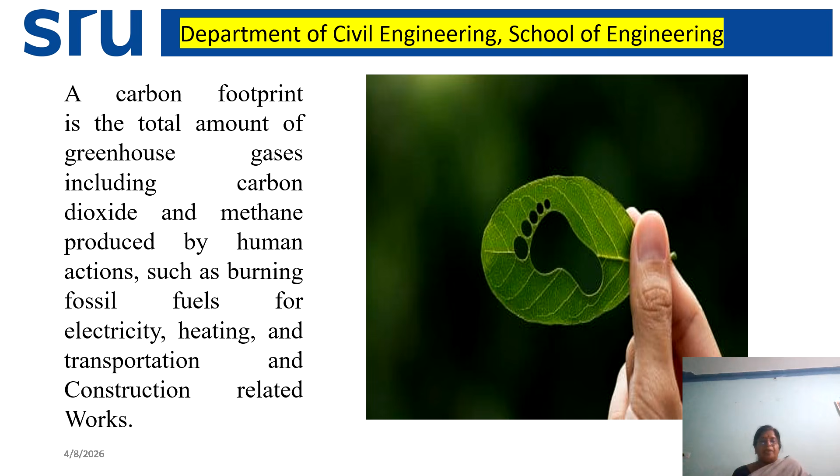After the 19th century, a big boom for the construction industry was established, especially with the Industrial Revolution, which led to urbanization and the vertical growth of structures. Fast and vertical growth is achieved in construction with the help of materials like brick, cement, steel, glass, aluminium, artificial paint, normal concrete, reinforced concrete, special concrete, and etc.

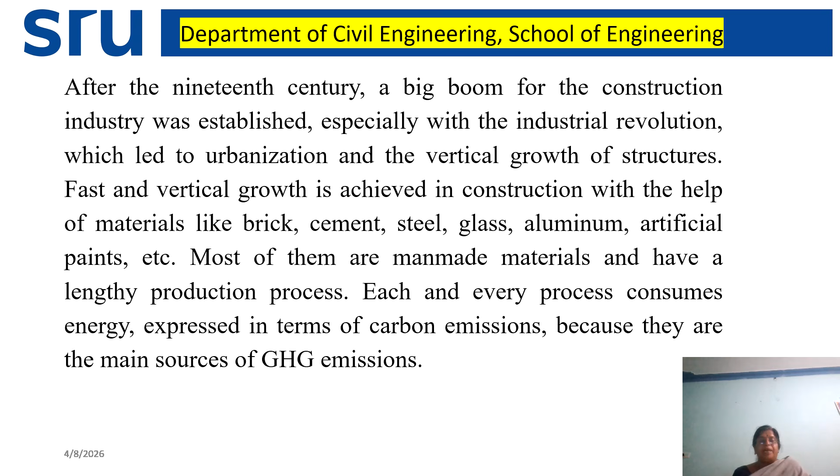Most of them are man-made materials and have a lengthy production process. Each and every process consumes energy expressed in terms of emissions of carbon, because they are the main sources of greenhouse gas emission.

Sources of carbon emissions from various sectors: industry 32 percent, transportation 23 percent, building operations 28 percent, building materials and construction 11 percent, and others 6 percent.

So here, building materials and construction related activities are totally responsible for around 39 to 40 percent of the greenhouse gas emissions due to construction related works.

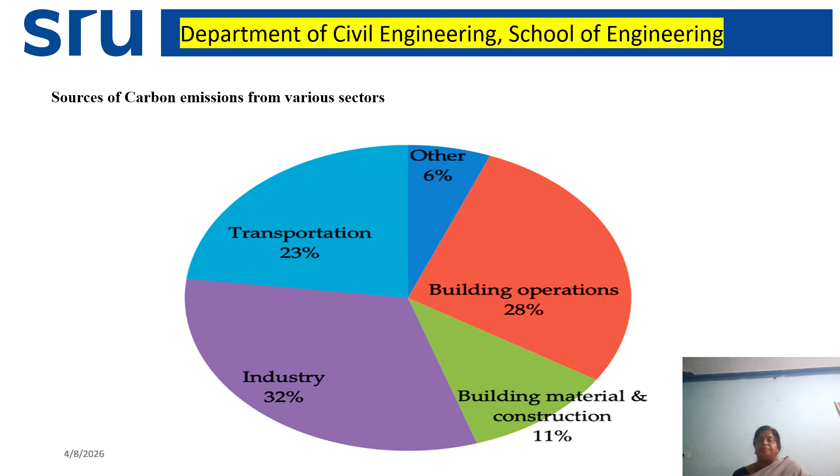Other sources of carbon emissions because of building materials: starting with cement, the prime material which releases 30 percent of the carbon dioxide. Next, ceramic materials, including floor tiles and wall tiles, emit 20 percent of carbon dioxide. Steel manufacturing - nowadays without steel there is no construction.

Steel releases 20 percent, concrete 12 percent, gravel 5 percent, aluminium 3 percent, prefabrication work 3 percent, wood 1 percent, and PVC and other materials 6 percent. These are the percentages of sources of carbon emissions from different building materials.

So instead of these materials, if we go for alternate materials, then construction related activities will be totally changed and the greenhouse gas emissions may also be reduced to some extent.

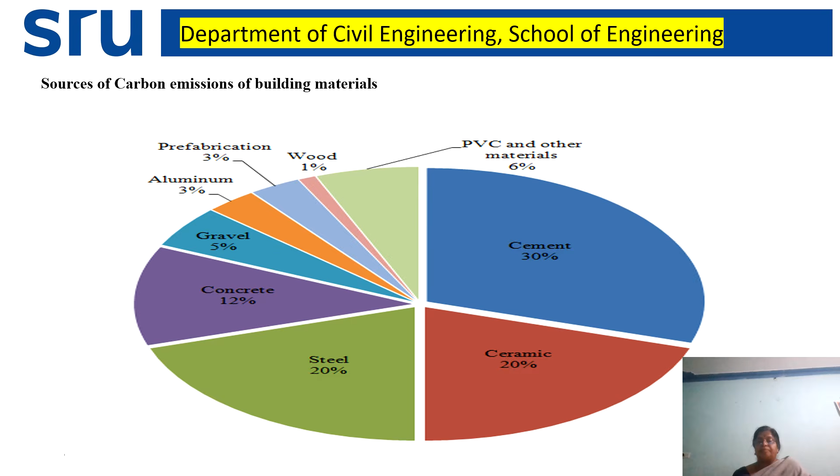The construction industry is a major source of carbon emission and contributes 40 percent of global CO2 emission. So the need for sustainable and eco-friendly practices is very, very important and essential. Carbon-free construction aims to eliminate emissions of greenhouse gases like carbon dioxide and methane.

So what is carbon-free construction? Carbon-free construction aims for zero or minimal carbon emission. It focuses on low carbon materials and methods, and use of renewable energy sources.

So the life cycle approach will be totally different. Design will be changed - the entire design is based upon what type of material we are using. Then construction practices: if the construction duration increases, greenhouse gas emissions will also increase, along with services and operation of buildings. So we are concentrating on building materials, design, construction, and methods.

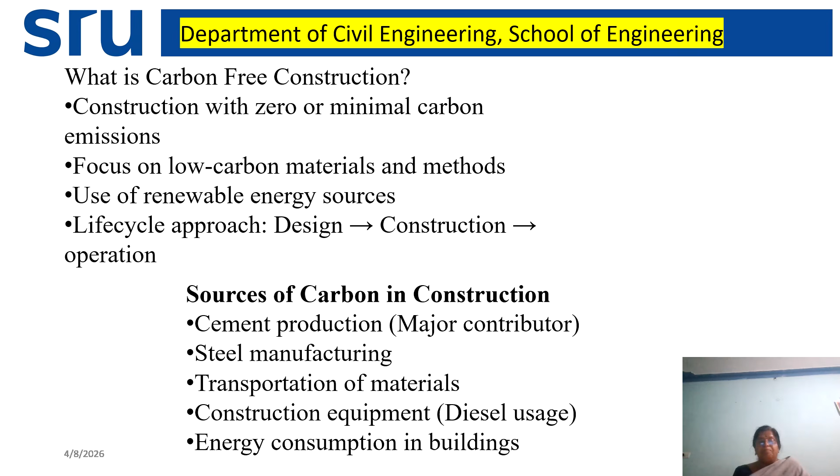Then we can reduce the maximum amount of carbon. So, sources of carbon in construction: cement production, steel manufacturing, transporting of materials from one place to another, construction equipment, and energy consumption in buildings during operation.

Acid rain also plays a major role due to urbanization. Because of urbanization, industry growth is more. That is good for the circular economy, but it is not good for the environment.

Once the gases are available in the atmosphere, when rain comes, it will not be normal rain. The pH value of the rainwater will be less than 7, and it is considered acid rain. Acid rain totally affects crop rotation, health of human beings, and other living beings.

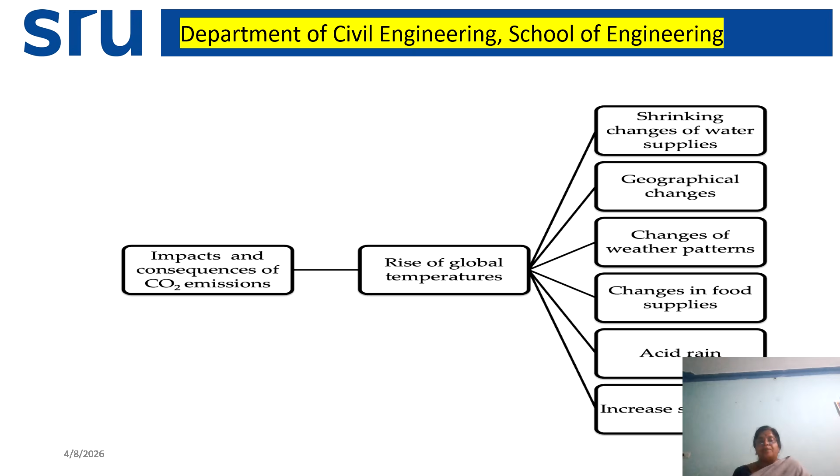So what are the strategies in reducing carbon dioxide emissions in the building sector? First, we have to set perfect standards and policies to reduce carbon dioxide, adopting low carbon technologies, then restriction of energy utilization, then impact assessment of the building process and materials. These are the strategies we can follow to reduce CO2 emissions at the construction site.

Here, standards and policies are very, very important. They should be created and implemented by the government, from the central government to the local bodies. All these things are to be first established and followed, so that we can easily control the carbon dioxide emission.

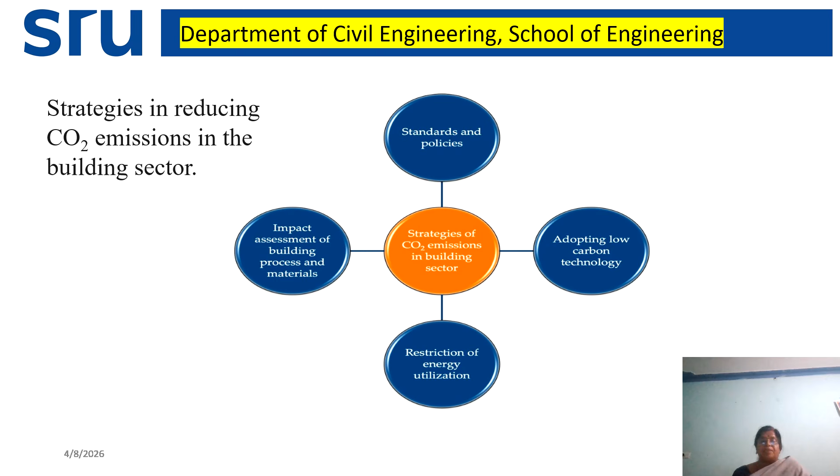Globally, construction materials are responsible for 40% of greenhouse gas emissions. Due to the emission of greenhouse gases, changing climate, global warming, melting of glaciers, and rising sea levels are the major issues related to the environment.

Rising sea levels due to melting glaciers will play a major role affecting maximum cities globally. Cities like Madras are situated at zero reduced level, so they will easily be occupied by sea waters when the sea level increases. Engineers and scientists are warning governments that by 2040, some places, mainly in South India, will go into the sea because of rising seawater levels.

So we have to take care of everything, and cities need to be protected from seawater intrusion, or the land should be protected.

These carbon emissions in construction can be reduced with the help of carbon-free construction materials like bamboo, lime, biochar, ceramic powder, fly ash, crumb rubber, and recycled aggregates. Reducing and replacing conventional materials with these low-carbon materials will control carbon emissions to a significant level. A lot of research is being done in this area to initiate the reduction of carbon emissions.

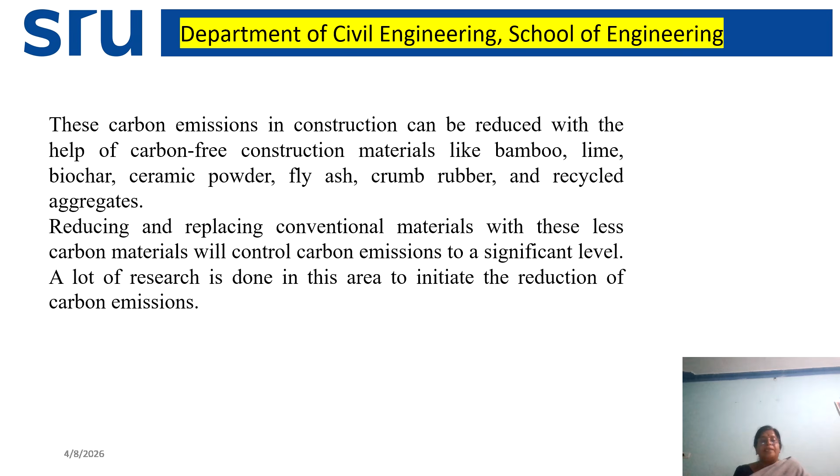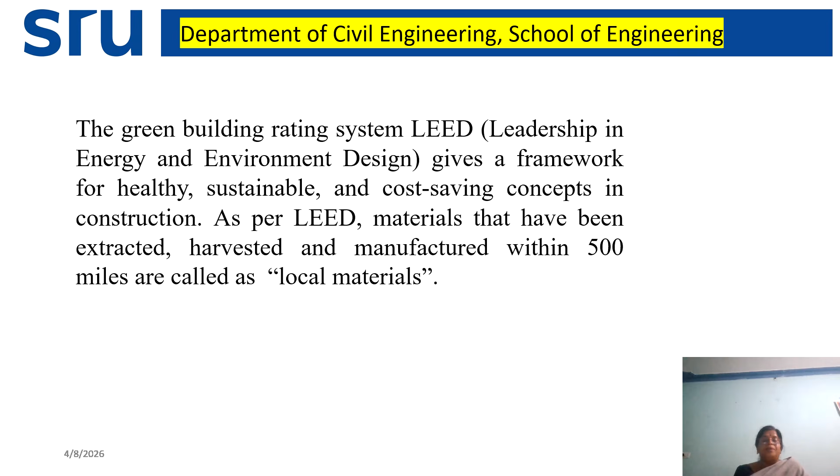The Green Building Rating System, LEED, which stands for Leadership in Energy and Environment Design, gives a framework for healthy, sustainable, and cost-saving concepts in construction. As per LEED, materials extracted, harvested, and manufactured within 500 miles are called local materials. If we use local materials, the transportation cost will be considerably reduced, so we can reduce the emission of carbon dioxide.

Major international rating systems: the first is LEED, Leadership in Energy and Environmental Design, developed by the USGBC, which is used globally. Another is BREEAM, Building Research Establishment Environment Assessment Method, the oldest system, followed in the UK. Next is Green Star, used in Australia, New Zealand, and South Africa.

Another one is CASBEE, the Comprehensive Assessment System for Built Environment Efficiency, which focuses on environmental efficiency in Japan. Another is DGNB, the German Sustainable Building Council, which strongly emphasizes life cycle performance. Another is WELL, or Well Building Standard, which focuses on occupant health and comfort.

For the comparison of green building certifications: the first is LEED, another is BREEAM, another is Green Globe, then Living Building Challenge, then GBI, which is based in Malaysia. All these standards are established to reduce the emission of greenhouse gases like carbon dioxide and methane, but the assessment procedure is somewhat different.

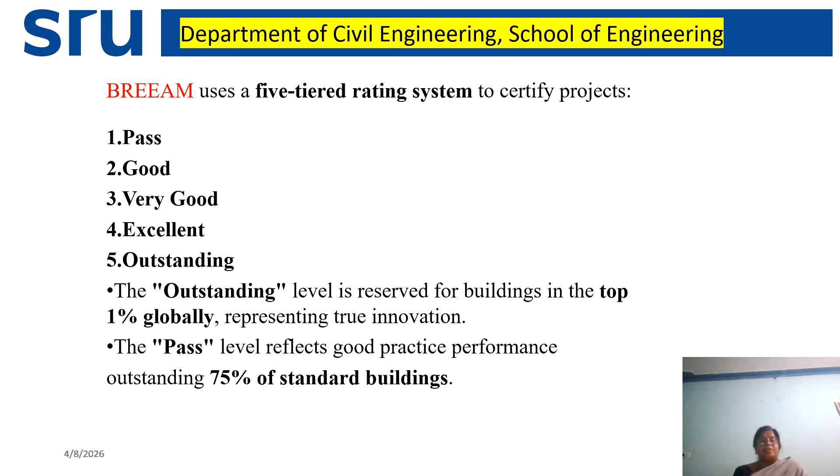The project must earn at least 35% of the total 1000 points to achieve Green Globe certification. The certification has four levels determined by the percentage of points achieved. The Green Globe certificate is totally different from the previous ones; here we rate with the number of globes, like 1, 2, 3, and 4 globes.

One globe means points lying between 35 to 54 percent, that is the entry level. Two globes means starting at 55 and ending at 69 percent, the next level. The third level starts at 70 percent and ends at 84 percent. Four globes is the extreme level certificate, responsible for 85 to 100 percent marks out of the 1000 points. So the higher ratings reflect greater environmental performance and project sustainability excellence.

In India, the green building rating system is based upon GRIHA, Green Rating for Integrated Habitat Assessment. This is India's national rating system by TERI and the Government of India. It is India's national rating system for green buildings, developed by the Energy and Resources Institute, simply called TERI, and adopted by the Ministry of New and Renewable Energy to assess the environmental performance of buildings throughout their life cycle.

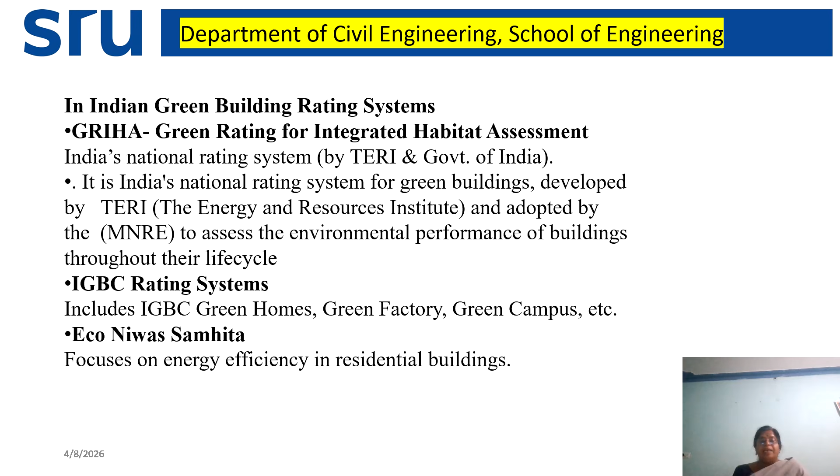The IGBC rating system includes green homes, factory, campus, and so on, and Eco Niwas Samhita, which focuses on the energy efficiency of residential buildings.

Other notable systems include EDGE, Excellence in Design for Greater Efficiencies, which is popular in developing countries. It is very simple and cost effective, and it leads to the Living Building Challenge, one of the most stringent green certifications.

The role of IGBC in India, that is Indian Green Building Council, is to drive sustainable construction in India through rating systems, certification, awareness and policy support. This rating system is different for buildings like green homes, green factories, green schools and green cities. These systems guide designers to build energy efficient and sustainable structures.

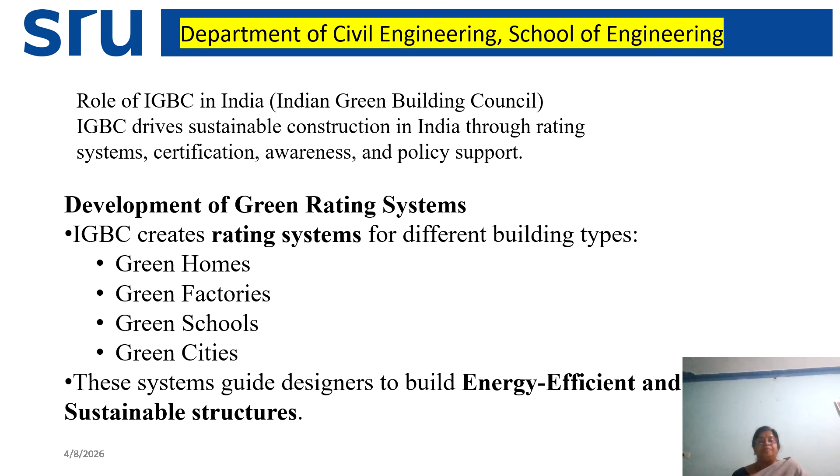The Indian Green Building Council is headquartered at the CII office, that is Sohrabji Godrej Green Business Centre, Hyderabad, India. Additional regional chapters are also available at major cities in India, like Chennai, Bangalore, Mumbai, and Delhi. These chapters support local projects and give training to construction people, along with certification activities.

The certification of green buildings evaluates projects as certified, silver, gold, or platinum. Certified is just the entry level. Silver is the second level. Gold is the better level, and platinum is the best level, the top level certificate. It encourages builders to achieve higher sustainability standards.

Promotion of energy and resource efficiency is focused on reduced energy consumption, water conservation especially through rainwater harvesting, and waste management. It supports India's carbon reduction goals.

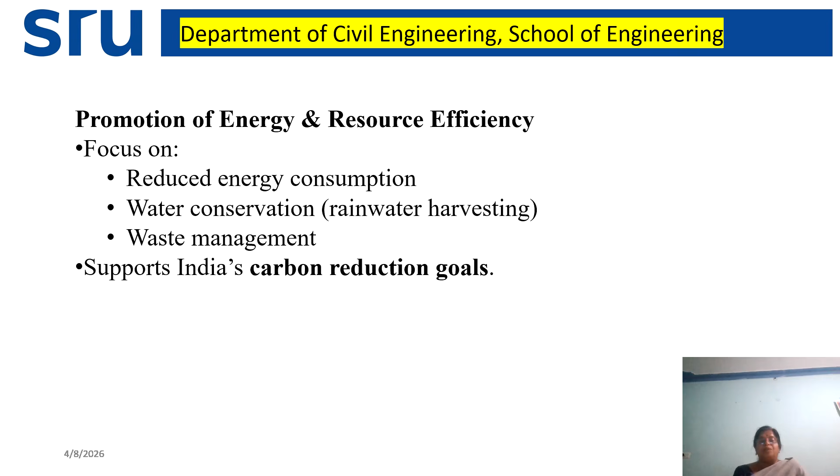It also creates awareness, training and capacity building. It conducts workshops, training programs and conferences, and educates architects, engineers and students about green construction.

What are the possible ways to reduce carbon dioxide emissions from construction and buildings? First, we can go for alternate materials. Bamboo is the best material which can be used as reinforcement.

Bamboo is very good at absorbing CO2 and releases 35% of its oxygen from the standing tree. Since long centuries, bamboo has been an excellent material and can be used as a structural and non-structural material like scaffolding. Bamboo is not good in shear, so stirrups should always be in steel.

We should not use bamboo for stirrups, but here we can regenerate it, which is the main good thing about it in construction. Nowadays, we are not at all using bamboo. We have to create awareness among students and other stakeholders about how bamboo can be used as reinforcement in construction.

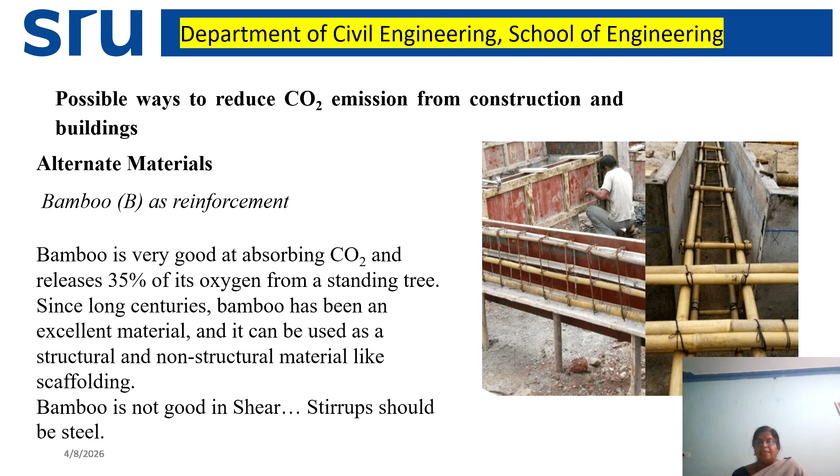So here we can adopt the main reinforcement as treated bamboo, and we can compare the properties of bamboo with steel.

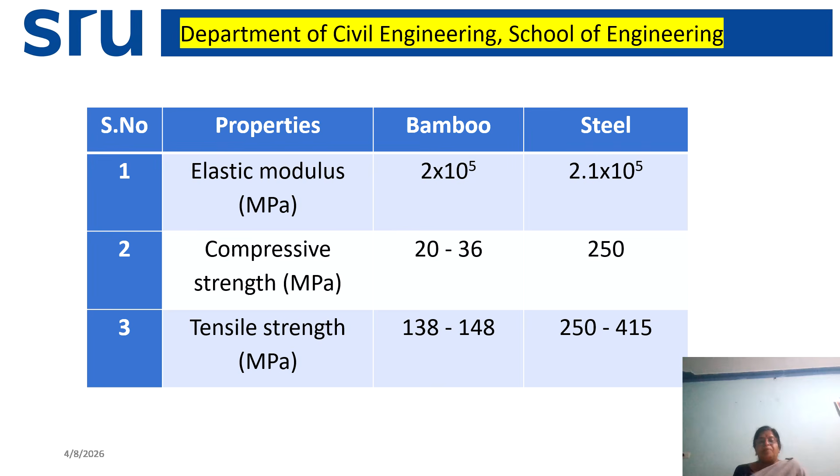For tensile strength comparison, bamboo can go up to a maximum of 150 Newton per mm square, while steel starts at 250 and nowadays we are able to get FE 600 as well. But even though bamboo's tensile strength is only 150 Newton per mm square, we can use it as a reinforcement material for temporary structures easily.

Next, we can go for cement replacement. Cement releases an equal amount of carbon dioxide during production, so nowadays a lot of measures are taken to reduce carbon dioxide from cement manufacturing.

Lime is an ancient material used for building construction. Hydraulic and non-hydraulic lime are the categories of lime. It is an alternative material for cement and is used in energy conservation. It has good workability, durability and self-healing properties, and due to its alkaline nature, it is highly resistant to acids.

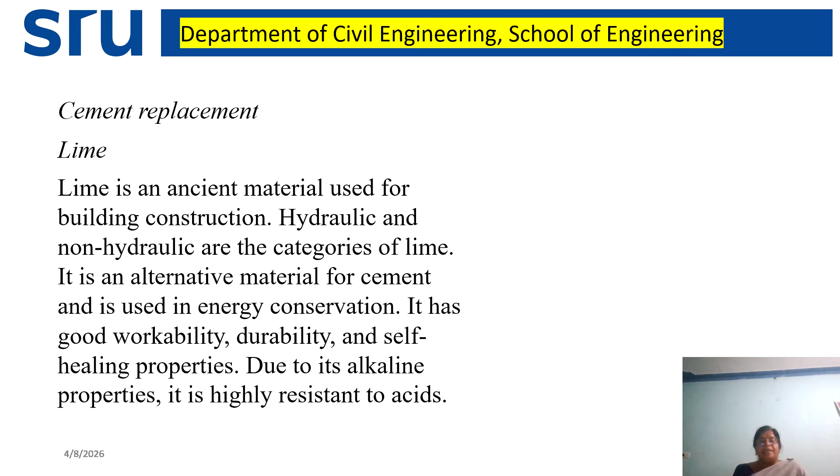Another option is fly ash. Fly ash is the residual substance resulting from the burning of coal, and is often regarded as the most readily accessible and underutilized resource globally. The global annual production of fly ash exceeds 900 million metric tons, so it has maximum advantages.

Fly ash can be easily mixed with cement during manufacturing. When comparing cement and fly ash, the particle size of cement is not round, but fly ash particles are perfectly round, so when mixed with cement, the workability of the cement can be increased.

Fly ash can easily react with the calcium hydroxide in cement, forming cementitious products again, which is responsible for the secondary production of CSH gel, so we are able to get high strength concrete. Fly ash is a waste material available at thermal plants, and this waste material can be converted into a wealthy material when mixed with or partially replacing cement. So Portland cement has been manufactured with 5% replacement of fly ash as a performance enhancer.

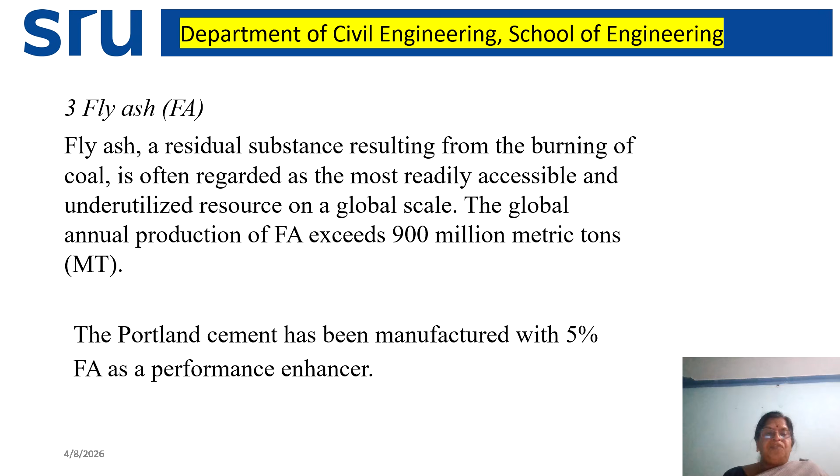GGBS is the ground granulated blast furnace slag. It is one of the important mineral admixtures, and an abundant quantity of such slag is available as an industrial byproduct. This has more calcium oxide and silicon dioxide content and is considered a supplementary cementitious material.

Silica fume, metakaolin, rice husk ash and sugarcane bagasse ash are a few examples of mineral admixtures employed for cement replacement, and the supplementation of these mineral admixtures in concrete as cement replacement material proved to be superior when compared with ordinary Portland cement.

When we are using fly ash, GGBS, silica fume, metakaolin, rice husk ash, and the remaining byproducts, the particle size of these products is very less compared with cement. So the pore structures present in the cement are easily filled with these byproducts, so that the permeability of the concrete can be reduced easily and the performance can be increased.

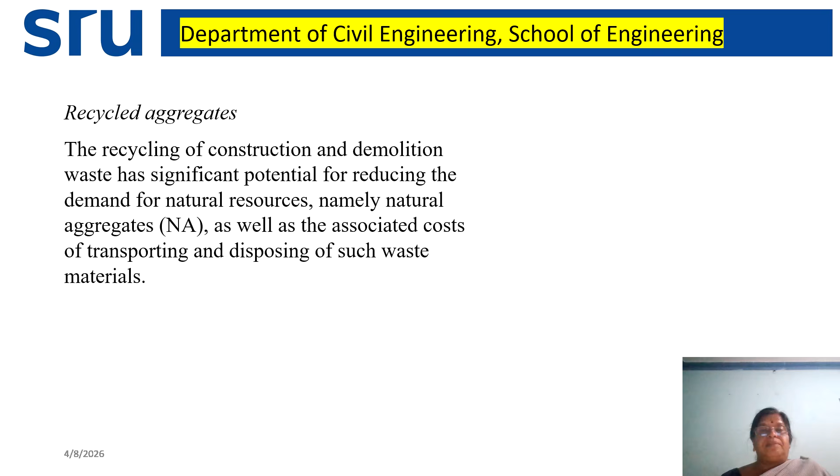Manufactured sand, or M sand, is an eco-friendly, high-quality artificial sand produced by crushing hard granite rocks into fine particles, offering a sustainable alternative to river sand. It features an angular shape for better concrete binding, and it is free from impurities, ensuring high consistency for concrete and plastering work.

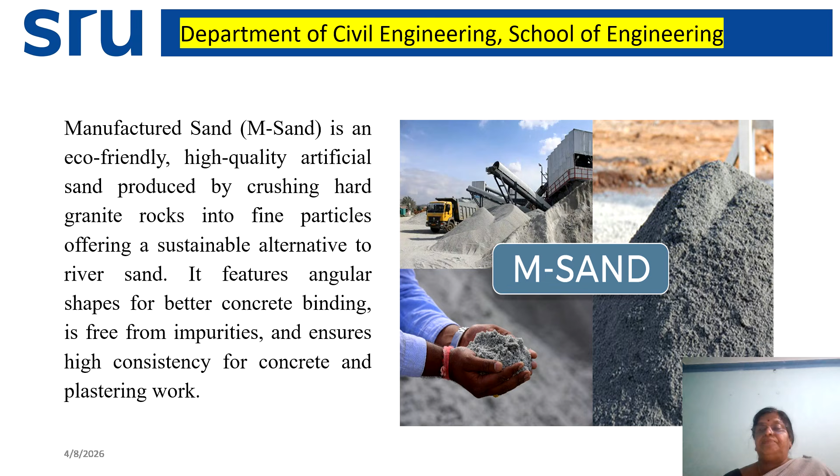The advantages are: cost effective, we can reduce the cost up to 40 to 50 percent less than river sand; strength is more, it offers high compressive and flexural strength to the concrete; wastage is zero, so no cleaning or sieving of the sand is required; and it is sustainable, reducing dependency on natural river beds so that we protect the river, and by protecting the river, the groundwater level can be increased, so that agricultural works will be maintained better.

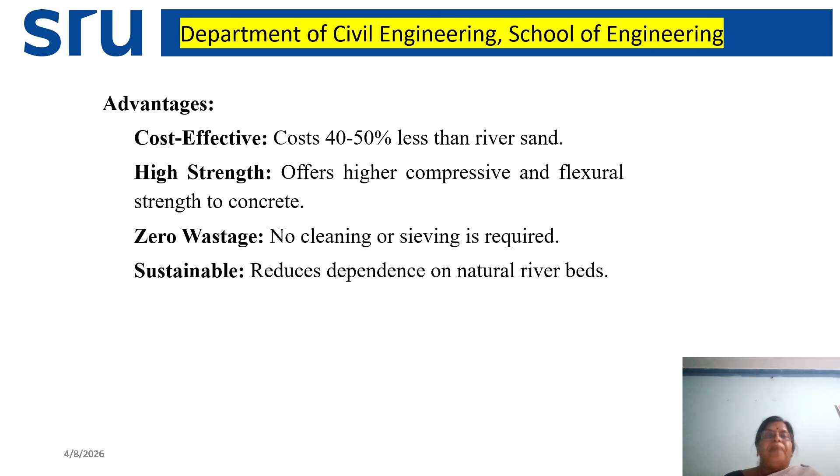The sustainable construction techniques are prefabrication and modular construction, 3D printing in construction, passive design such as natural ventilation and lighting, and efficient structural design to reduce material usage. These are some methods of construction to reduce carbon dioxide emissions.

Renewable energy integration should be implemented at all buildings, and we have to insert solar panels. Then we can go for wind energy wherever applicable. Net zero energy buildings should be designed. Then energy efficient systems like LED and smart controls should be applied at residential and commercial buildings, so that we can maintain carbon neutrality, or carbon emissions can be controlled easily.

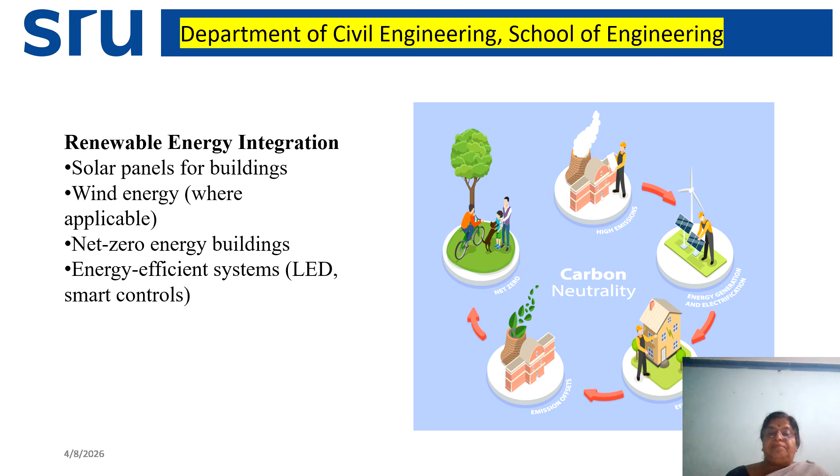The benefits of carbon-free construction are: it reduces the impact on environment, it saves energy and operational cost, it improves air quality, and the lifespan of buildings will be increased. It supports the sustainable development goals.

The challenges in the adaptation of carbon-free construction are: the initial cost will be more, so high initial cost we have to bear; then limited awareness and expertise among the public, so we have to create awareness from schools, colleges and universities; and availability of materials we have to search for, selecting the best materials for construction.

Then there is a need for policy and regulations; up to now there are no strong policies and regulations available to control carbon emissions. So if policies are strong, then carbon emissions will be controlled easily, and technology adoption barriers need to be removed so that these systems will be easily adopted by the public.